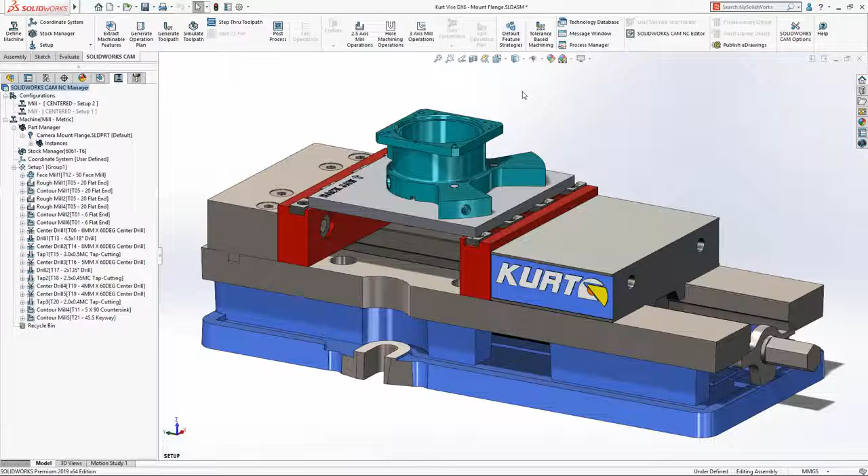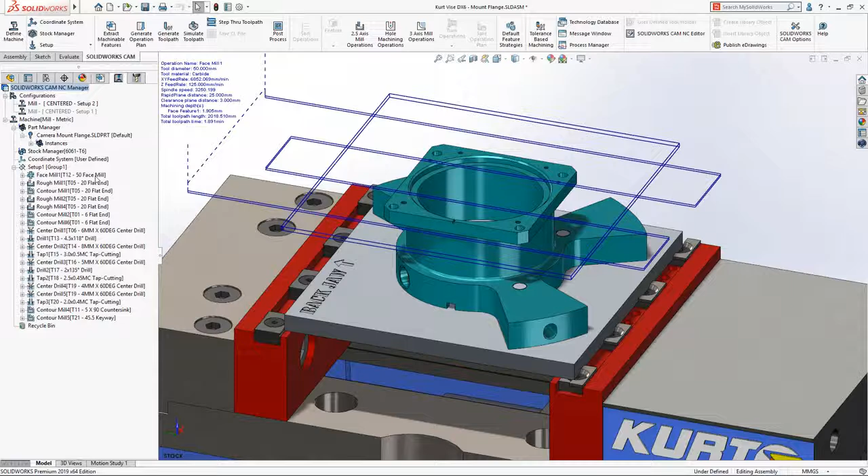SOLIDWORKS CAM 2019 delivers some great new features that will help you reduce the time it takes to program your parts. Configurations in SOLIDWORKS CAM are a great time saver that enable you to define multiple manufacturing setups within a single part or assembly. 2 configurations, each containing their own unique set of manufacturing operations, have been defined in order to machine the front and rear flanges of this camera mount part.

Switching configurations to setup 1 reorientates the part and changes the operations tree to display only the operations unique to this setup. To finish programming the camera mount, we're going to make some changes to the contour milling operation for the outer faces. As the straight tool gets to the bottom of the part, there's a risk that the shank will touch some of the faces at the top that were already machined earlier in the operation, spoiling the surface finish. SOLIDWORKS CAM 2019 adds new taper and neck options for the non-cutting portion of a tool.

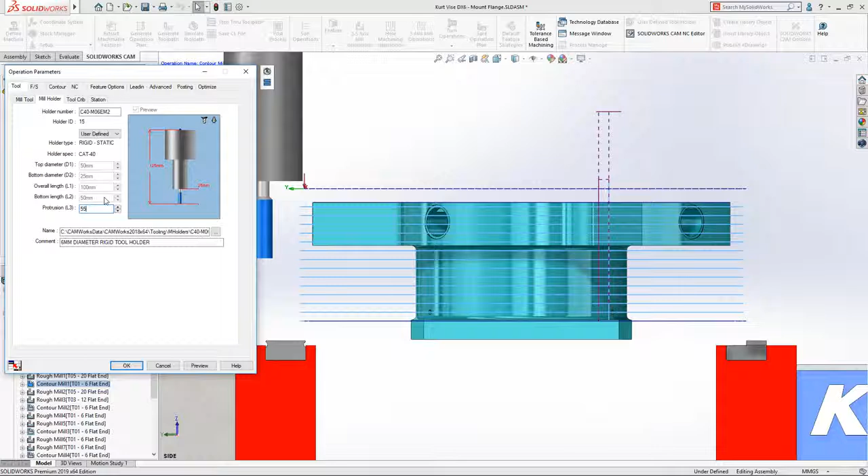For this operation, we'll change the type to neck and then specify the size of first the tool neck, followed by the tool holder. As sizes are inputted, the preview of the tool updates in the graphics area, showing the new tool and holder shape in relation to the part, so you can now predict the final result with even greater accuracy. Another great enhancement for 2019 is the addition of the new corner slowdown option. By enabling corner slowdown, you can now vary the feed rate based on distance, resulting in increased tool life and improved surface finish.

NC programmers using multiple machine tools can now take even greater advantage of SOLIDWORKS CAM's powerful automation capabilities. The technology database now provides you with the option to define multiple machining strategies and assign them to a specific machine. The remaining features of this camera mount are going to be machined using a 4-axis rotary table. 3 different sets of machining strategies have already been predefined in the database, including one for a 4-axis rotary table. Selecting the 4-axis rotary set displays the list of its unique features and operations.

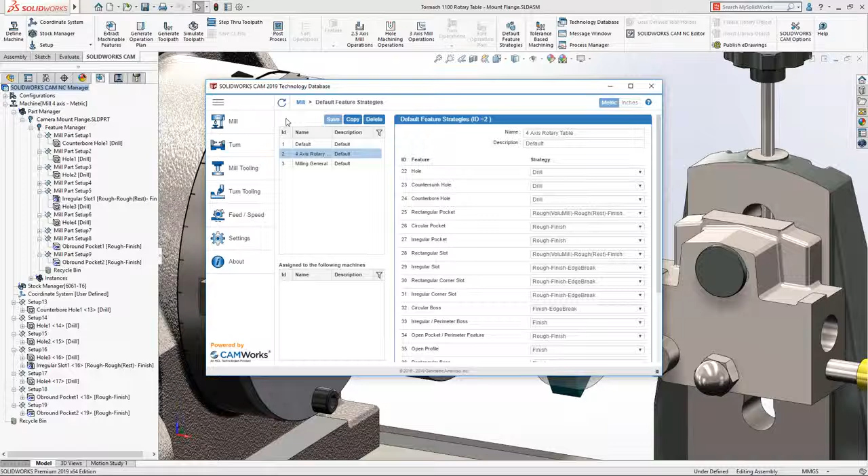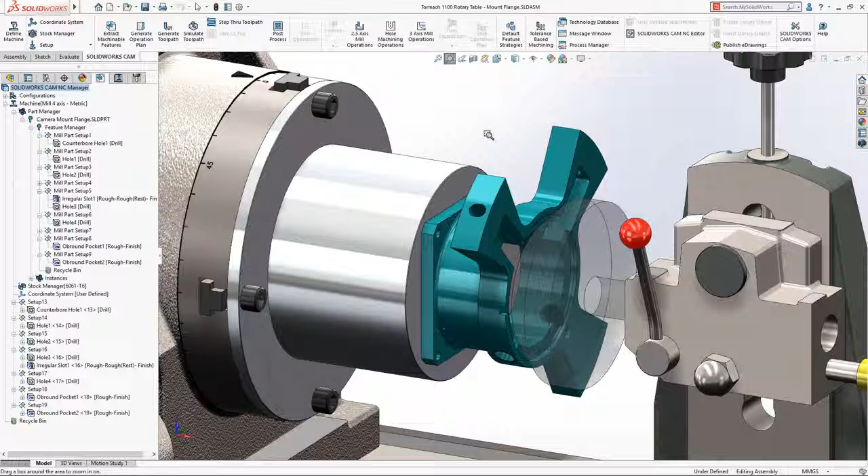We'll go ahead and make a couple of changes by setting the rectangular corner slot and circular boss to use rough finish edge break operations, then saving to update the overall strategy set. After switching to view the properties of the 4-axis machine tool, the 4-axis rotary strategy can be chosen as its default machining strategy. By using this machine in combination with SOLIDWORKS CAM's automatic feature recognition, an optimized set of operations will be automatically generated. SOLIDWORKS CAM 2019 also adds some great productivity enhancements for creating everyday machining operations.

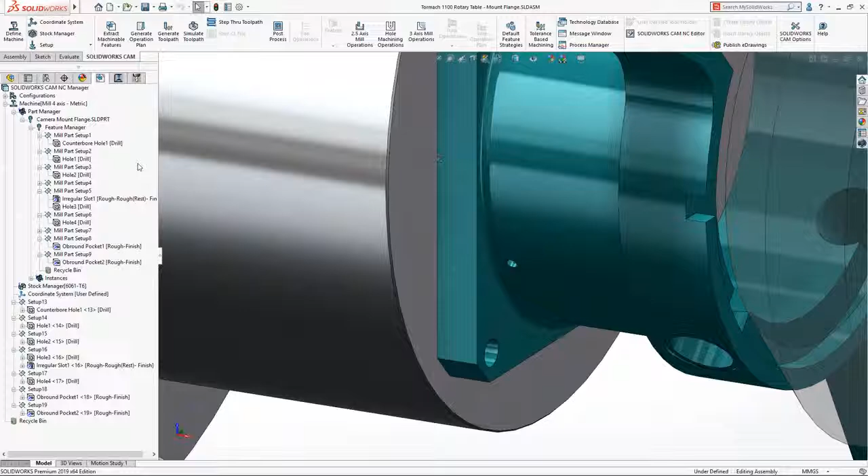For example, new options to control hole start and end position provide much greater flexibility when you're defining drilling operations. Now you can set an offset to feed in from a specific distance and drill to a specific position regardless of feature size, eliminating the need to create any extra construction geometry. When having to meet strict tolerance requirements, it's often necessary to have to offset the position of a tool path in relation to the model geometry.

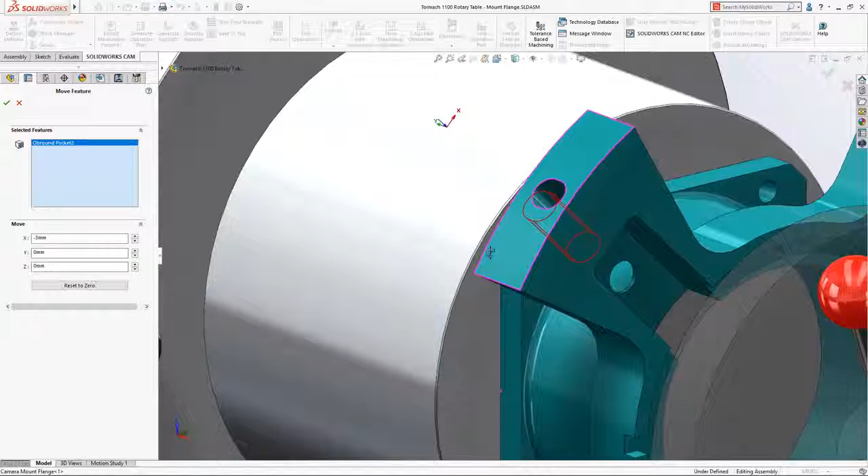Even small incremental adjustments can result in time-consuming workarounds, for example, manually editing the NC program or even changing the model geometry. In SOLIDWORKS CAM 2019, you can now change the position of machined features using the new Move command. Features can be moved in X, Y, and Z, providing a great way to easily machine to mid-tolerance without the extra rework that's often necessary. Those are some of the fantastic new features in SOLIDWORKS CAM 2019 that can help you improve quality and reduce the time required to generate NC programs.